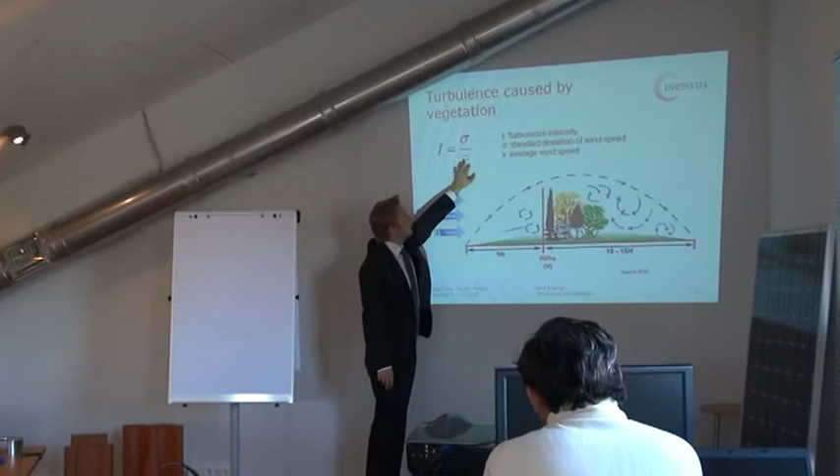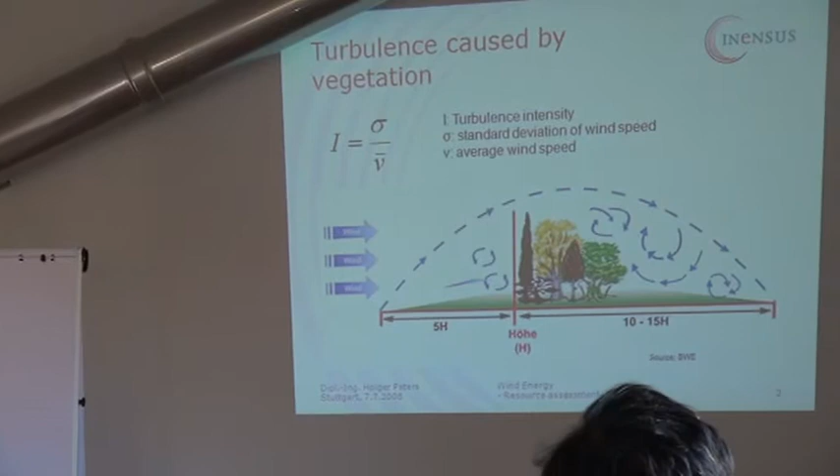Turbulence intensity I is the standard deviation of the wind speed divided by the average wind speed. So this is how you can make I independent of the actual wind speed, and you can get a value for a certain site. Standard deviation of wind speed divided by average wind speed. Turbulence comes from obstacles in the surroundings: bushes, houses, whatever, cars, rocks.

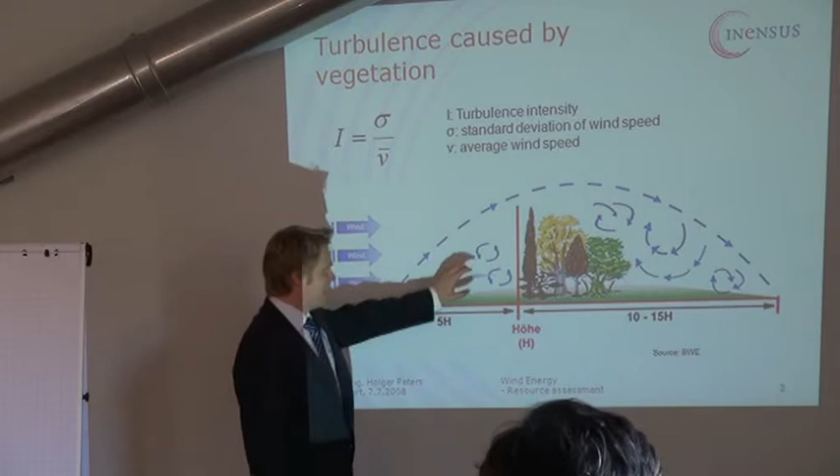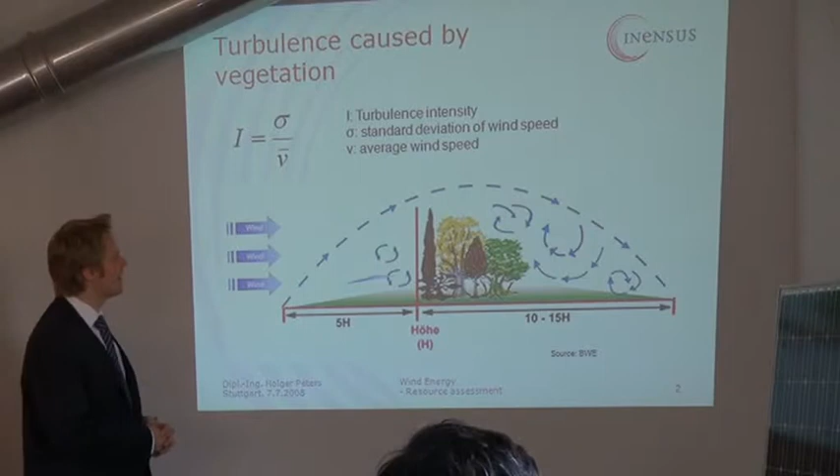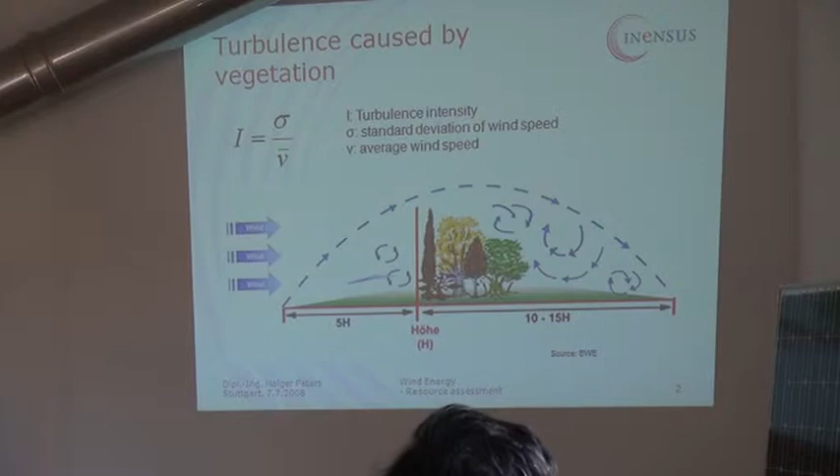And just as a rule of thumb, you're definitely outside of the turbulence area if your rotor is twice as high as the highest obstacle in the surroundings. Otherwise, nobody, even aerodynamic experts, can estimate turbulence areas by just looking at them.

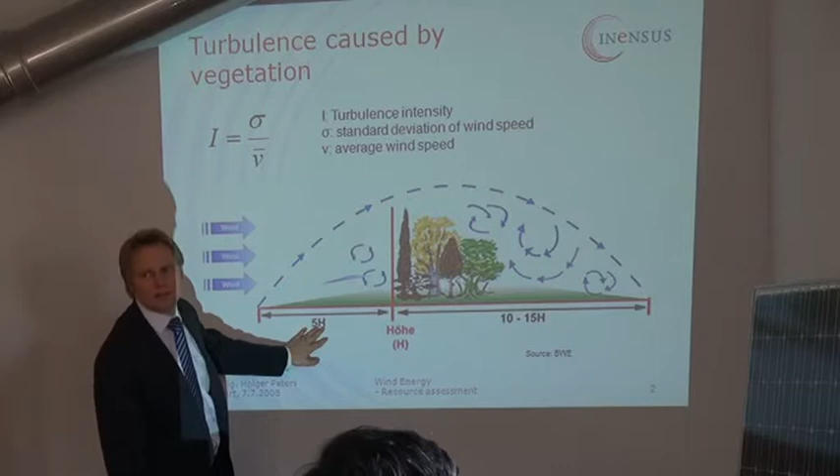There's another rule of thumb. Turbulence areas extend 10 to 15 times the height of the obstacle behind the obstacle. And there's also a turbulence effect in front of this obstacle of 5 times. Just as a rule of thumb.

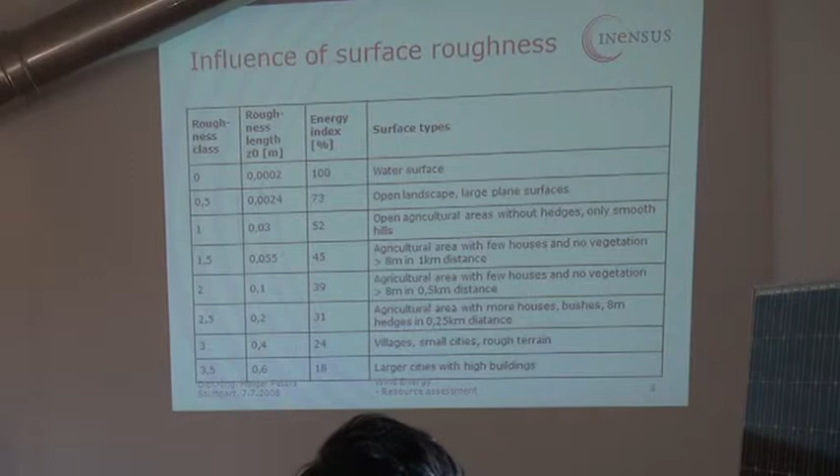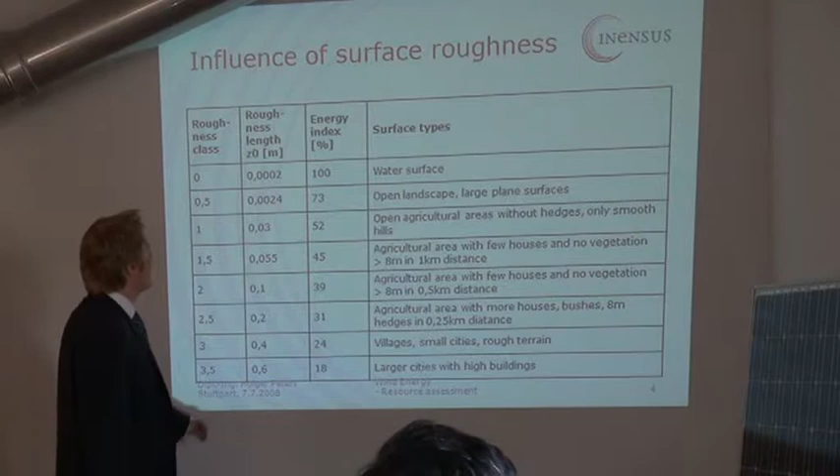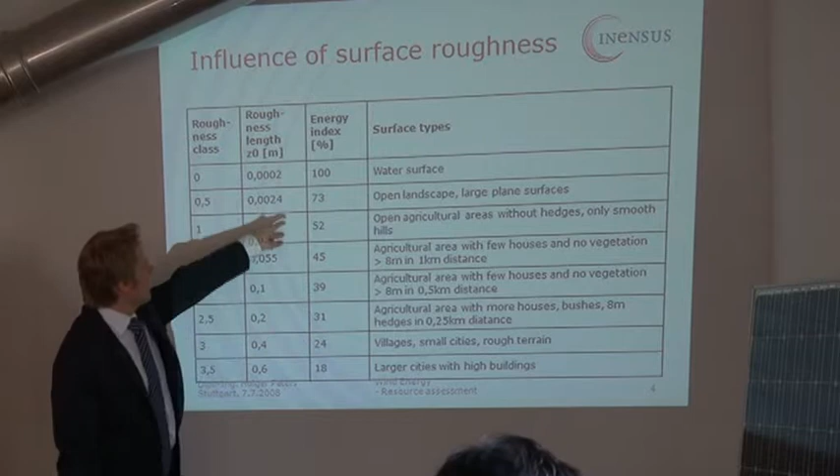Okay, this is what we've been talking about already. Here are some roughness lengths. And this is also very interesting, the energy index, just to give you an idea. If you've got a water surface, you've got a very low roughness length, you've got 100% of energy coming from the wind. Now, if you have more roughness length, you can get down from 100% of energy to 18% of energy, just because there is more turbulence in that area. Same wind speeds, but just more turbulence.

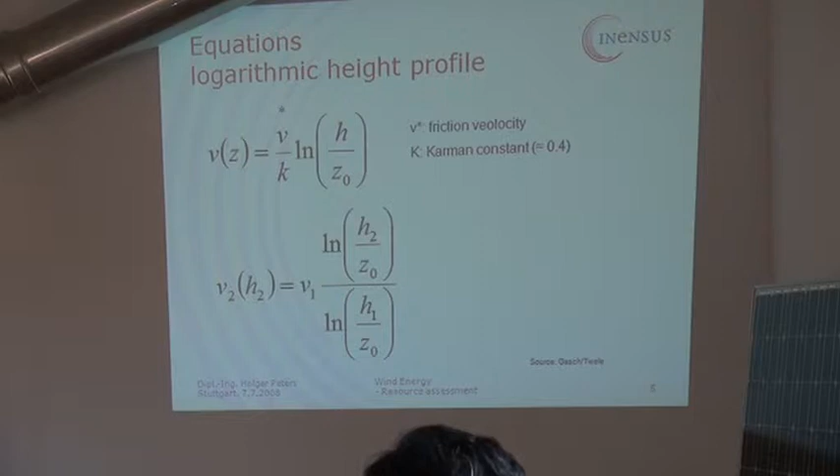And this is the formula you use to calculate from one height to the other using the roughness length. You probably know that, don't you? Yeah. You know that formula.

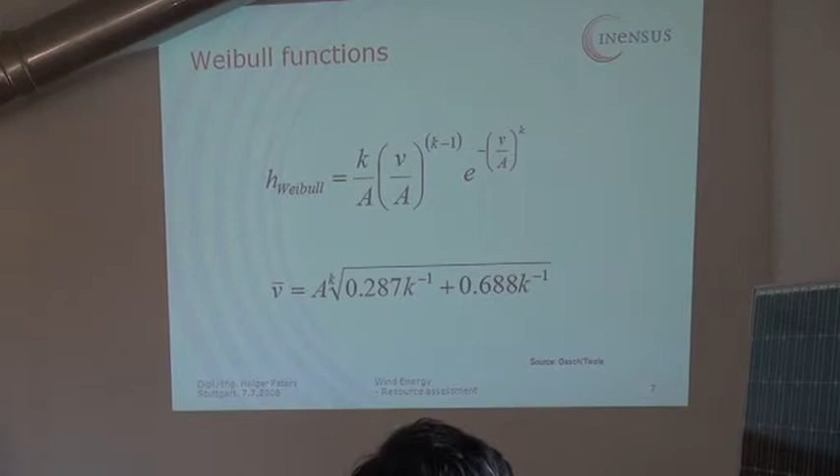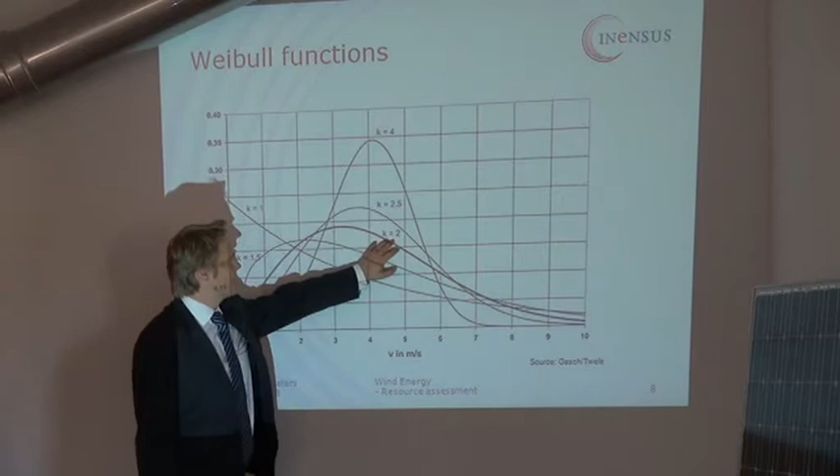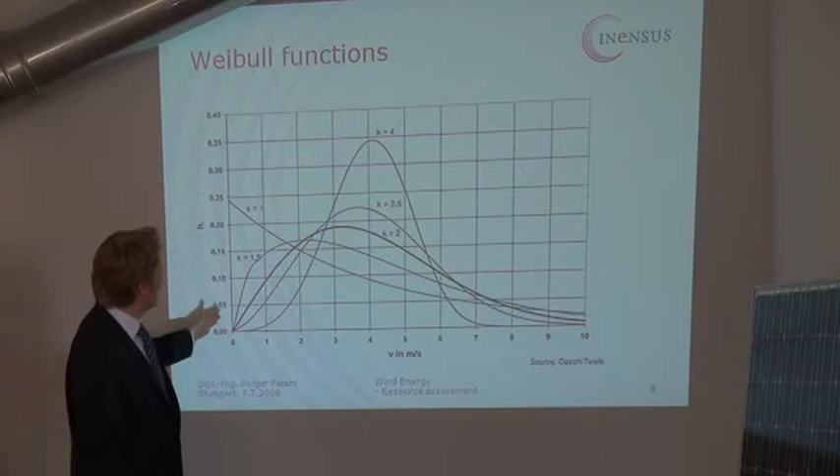Okay, wind data assessment. You get this kind of data from your data logger, and then you can derive Weibull functions from that, which look like this, for example. A usual Weibull function for a wind site is the function with k equals 2. If you don't have any wind data available, you just have an average wind speed, then you take the k equals 2 curve to estimate your energy yields. And that is called the Rayleigh distribution. If you have a Weibull distribution with k equals 2, then this is the Rayleigh distribution.

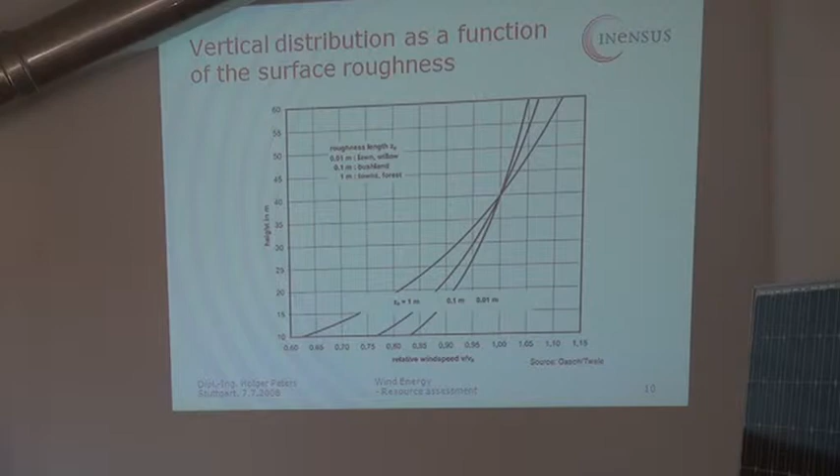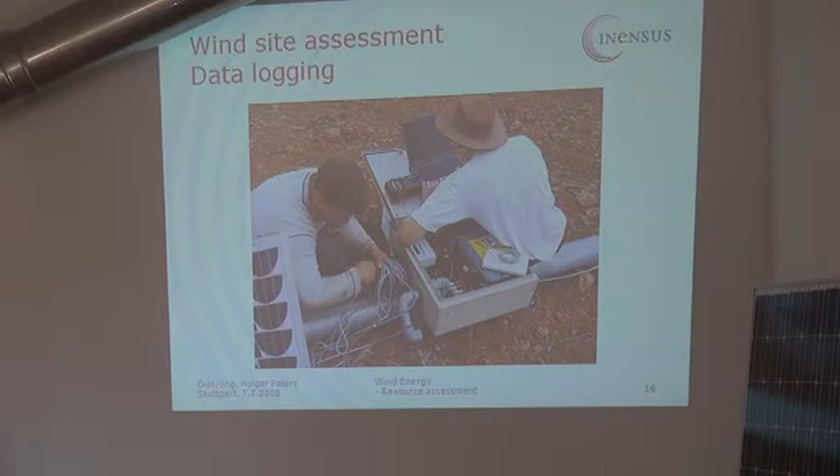This is again the change of wind speed with height. This is some information about wind monitoring. This is also what we do sometimes, large wind monitoring. So you've got a mast, a tilt-up tower, and you connect the measuring system. You see, this is quite complex, quite a big box. In this unit, the data logger integrates all of that electronics on one circuit board, more or less. And then you have a grip hoist, for example, to pull the whole thing up. So this is, I think, a 60-meter tower.

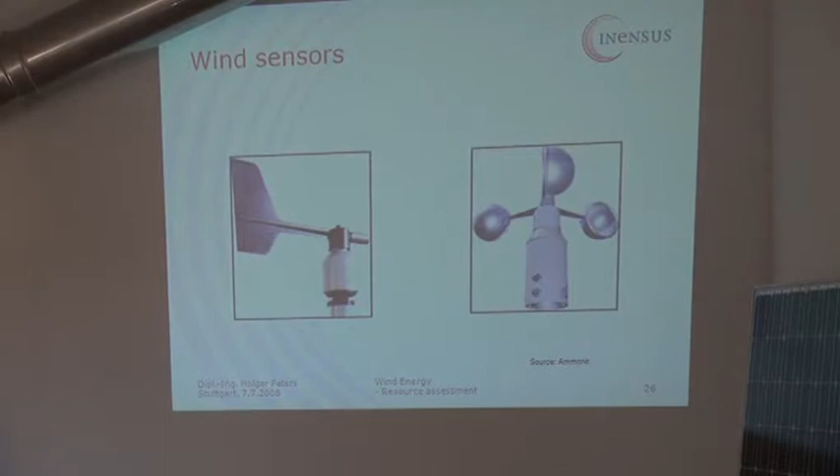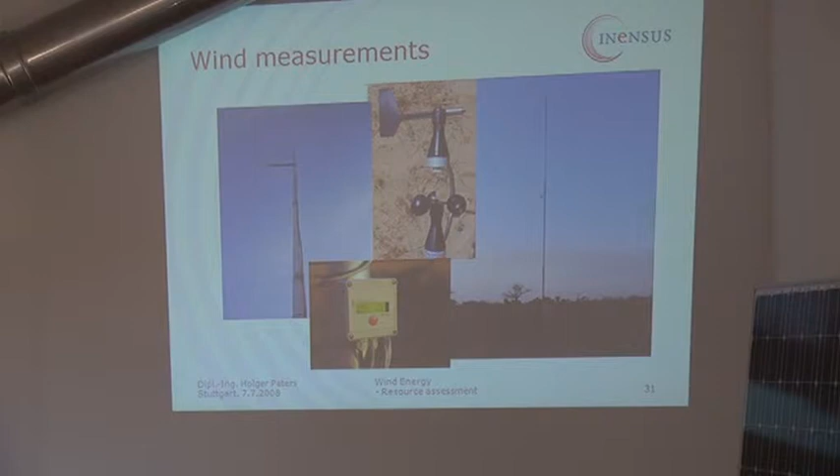Sensors, calibrated sensors. So this is actually the wind monitoring system, as you've got it on your flyer. We measure every 5 seconds, and then you can select the averaging periods. You can record 5-second steps, then you have a data set which cannot be handled easily by Excel anymore; you need an additional tool for that. Or you let the data logger compress the data by building averages of 10 minutes, 15 minutes, 30 minutes, or even 1 minute or 5 minutes, depending on what you need.

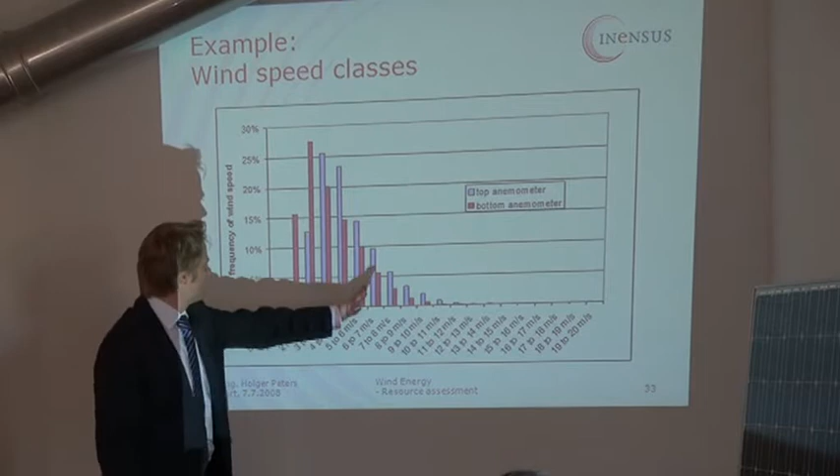Right. So this is an example of a wind data evaluation. You get the wind data from, for example, 2 anemometers. The blue one is the top anemometer. You see that this has got the higher wind speeds, and this is a graph showing the percentage of time at which a certain wind speed occurred. So for example here, at the top anemometer we had 3 to 4 meters per second some 26% of the time. And at the bottom anemometer, we had this wind speed approximately 20% of the time. So this is how you can walk through all of the columns.

So normally we put this anemometer at the hub? Yeah. That would be advisable, but it always depends on your budget, if you can afford a tower high enough to measure at hub height. If you don't have that budget, you can still measure below and extrapolate to a different height with a logarithmic formula. How is the accuracy when we do the extrapolation? If you've got several measurements below, like 2, 3, 4 or even more, you get a pretty good idea about the roughness length.

And then, for example, if you've measured up to 30 meters and your hub height is 40 meters, that is very reasonable, can be done. These towers we have here are 10 and 15. So we say, okay, if you go up to 18 meters and you don't have any obstacles in the surroundings that are higher than 7, 8 meters, then you're well off. You can extrapolate to 18 or even to 20 meters.

But some of our customers want to measure at 15 meters and want to extrapolate to 40 meters, and that doesn't make sense anymore.

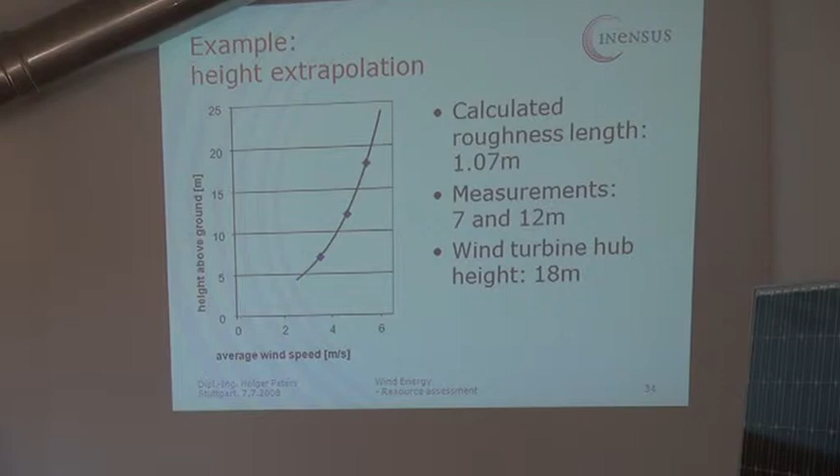Yeah, and then of course you can extrapolate to other heights, and you see, okay, the average wind speed gets more. At most wind sites throughout the world, you have quite a strong daily wind pattern. And I would assume that in most of your islands, you also have a very strong daily wind pattern because of the land sea breeze.

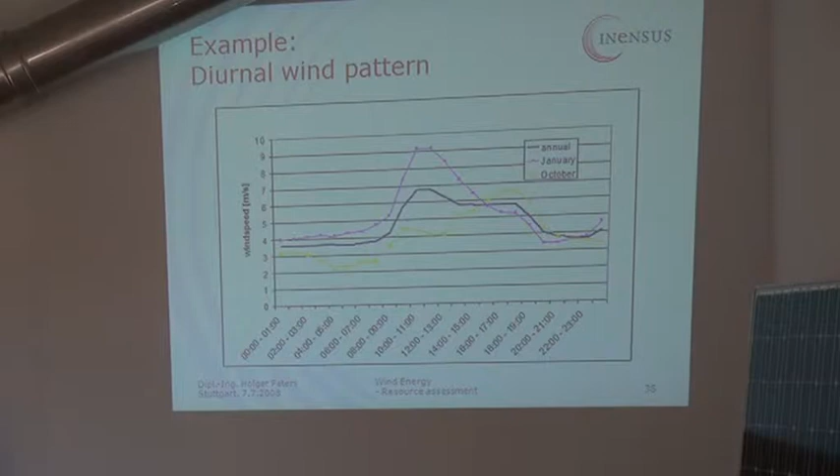Yeah, but it depends on the location, because actually in Indonesia, at the north of Indonesia, it's very, very low speed. But at the south and west... Yeah, but even in the low wind speed areas, you probably have a few hours of the day which are quite constant, where you have a little bit more, and a few hours of the day where it's less. And that is usually due to the land sea breeze, the temperature differences between land and sea, and then sometimes it goes around like that, and sometimes it goes around like that.

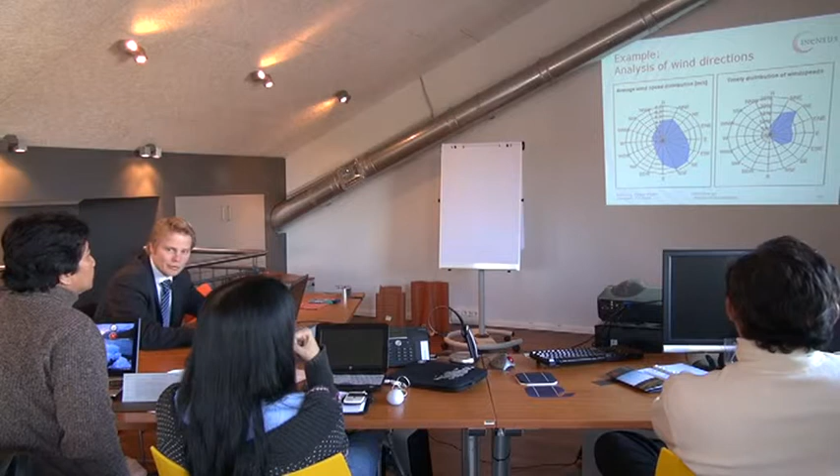Then you can analyze the wind direction in terms of the average wind speeds coming from different wind directions and the percentage of time the wind came from a certain direction. And from this information you can derive which of the obstacles in the vicinity have which effect on the rotor and the wind turbine. And this should also be analyzed. If you do not analyze that, you might put the wind turbine at the wrong spot.

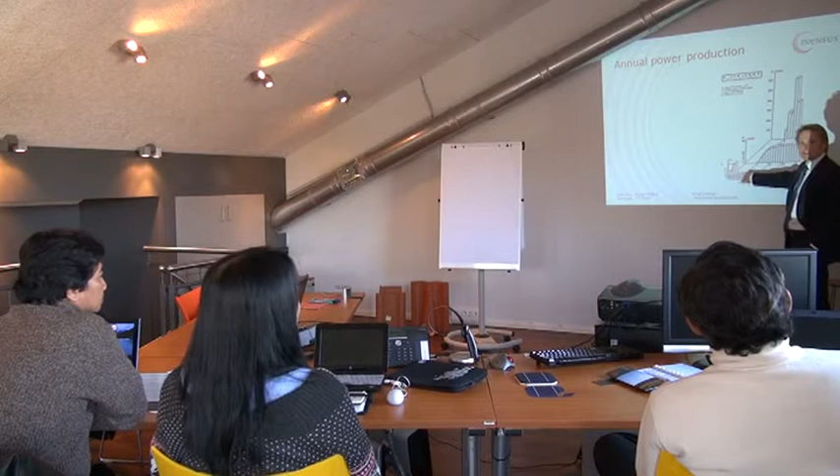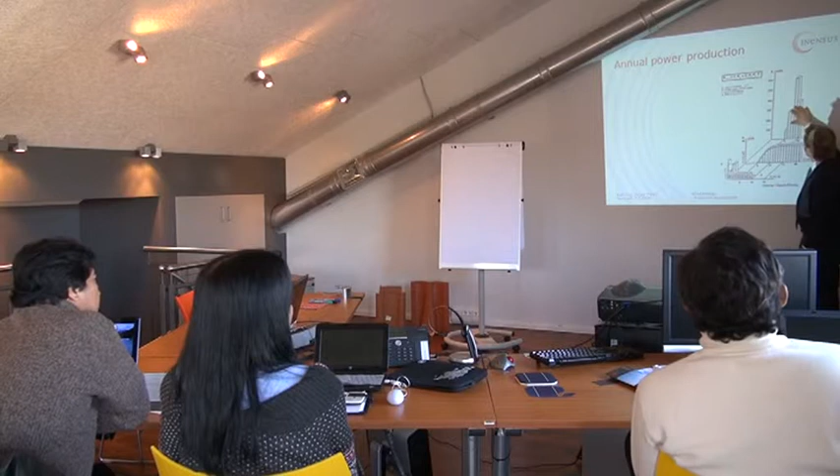And the calculation of the electricity cost is at the end the annuity of the total expenditure divided by the energy yield per year. And the energy yield per year is calculated like this. These are the columns of the wind speed as measured with the measuring device. This is the power curve of the wind turbine. If you have a stall wind turbine, you have got like this, like we saw before. And if you multiply each of the columns with each other, you get a row of columns like this. And if you add up the kilowatt hours of each of the columns, you have got the annual energy yield.

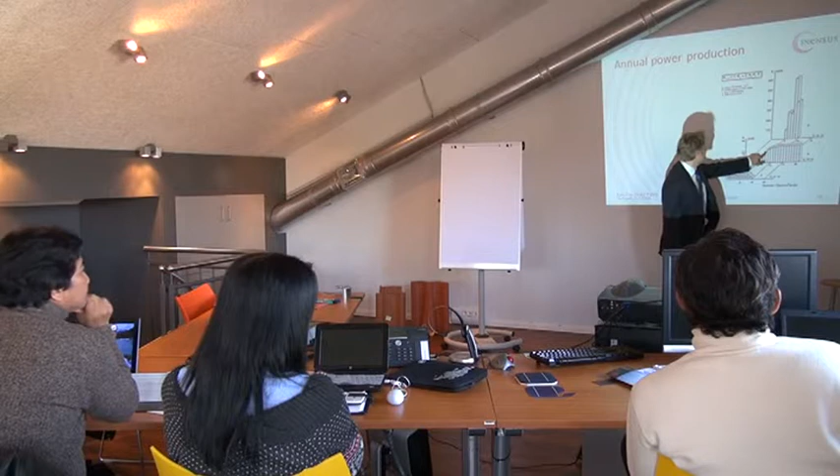Okay, maybe once more. So for example, here you see 6% of the time we had 8 meters per second. At 8 meters per second, you get some 10 kilowatts of power from your wind turbine. Then you say 6% times 8,760 hours per year is that many hours per year. Times 10 kilowatts is a certain number of kilowatt hours. And that is what you produce, and that is what you see here at this column. And that is what you do for each and every column, and if you add up all of them, you get the annual energy yield.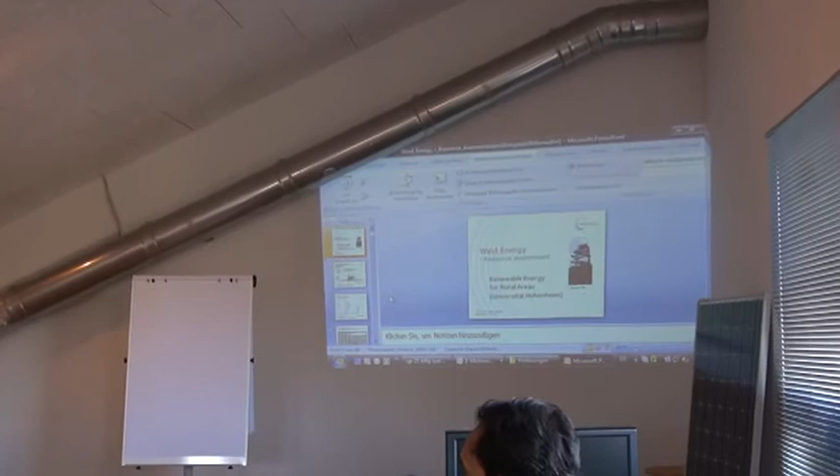Okay, we're already through with this. I think probably the most important information for you is if you have to control a generator and a wind turbine, make sure that you have proper safety systems installed. Even if you build a wind turbine for low wind sites, sooner or later there will be a gust or a storm which destroys your wind turbine if you don't calculate it correctly according to the wind class you design it for and if you don't set up a safety system, like a stalling system. And usually it is the best idea to combine an aerodynamic brake with a generator brake as one system.

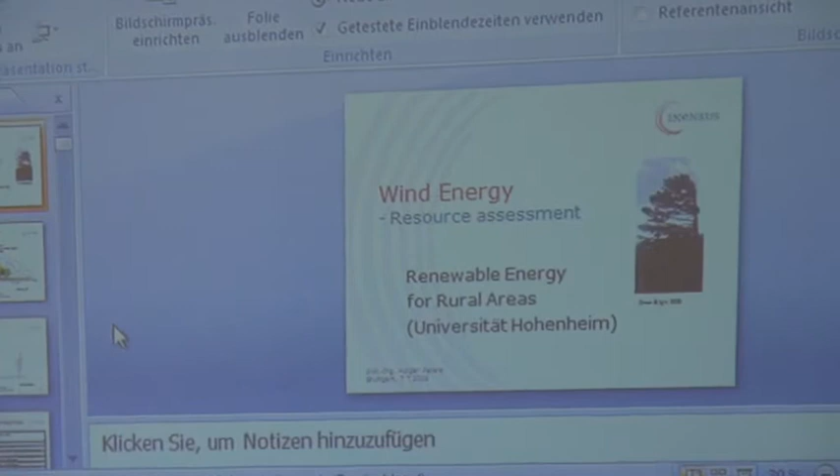That is very cost effective because you just need to monitor the power output, and when you get close to the maximum, just decrease the rotational speed, you get a stall effect, and the rotor automatically decreases the power output. So that is one brake, which, if you do microcontroller systems, should be quite easy. The second brake could be either an active aerodynamic brake by turning the blades, or it could be a mechanical brake, which is usually very difficult to realize because you need some backup power to activate the brake or to keep it locked.

We usually recommend not using this mechanical brake because it creates problems, but only in small wind turbines. In large wind turbines it can be done, but in small wind turbines we do not recommend it.

Another very famous version for small wind turbines is simply furling, turning the rotor out of the wind. That could be done either with an electromechanical approach, like measuring wind direction and actively turning the rotor out of the wind with a yawing motor, or alternatively with a pure aerodynamic mechanical approach, using a slight eccentric force introduction of the rotor thrust into the generator. The generator is not in the middle of the tower, but slightly eccentric, and the higher the wind speed, the more power.